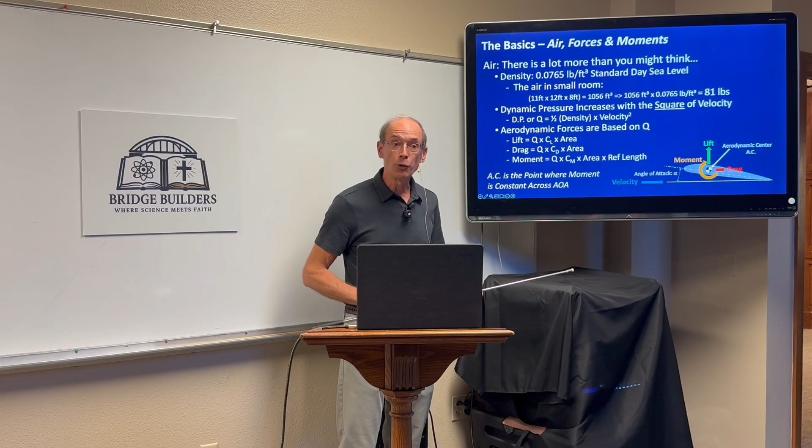But if you're running 30 miles an hour and you start doing that, there's some force on it. But if you do it at 60, you're going to really feel it. And so now let's kind of tie that back. First of all, let's talk about air. We've talked about that a little bit already. We talked about how if we didn't have a magnetic field on Earth, the solar winds would carry the atmosphere away. So it's a miracle that we have an atmosphere that's as stable as it is, consistent, and dense. So I mean, it's really kind of amazing.

The density of air is like a little less than 1/10 of a pound per cubic foot. So you got a cubic foot that's like this big, less than 1/10 of a pound. And it doesn't sound like a lot, but if you look at it a different way, if you take like a small bedroom, like 11 by 12 by 8, and if you could compress that air into like a block that you could carry, it'd weigh 81 pounds. So there's a lot more air than you think. You always think air is just a little bit more than a vacuum. Well, there's actually a lot of density in that air, and that's very important when you're considering aerodynamics and forces on a wing.

There's a thing called dynamic pressure that's key in flying. And the way it works is you take the density of the air and you square the velocity. So again, back to the example, your hand out the window. You're going 30 miles an hour, you've got a certain amount of force. When you go 60, the force doesn't double, it quadruples, because there's a square term. And then you take half of it, and that's just kind of the way the math works for that particular equation. That's called dynamic pressure, and sometimes you'll hear it referred to as Q.

A lot of times when somebody's talking about an aircraft regime of flight, they'll talk about a high Q situation. That means it's going really fast. There's a lot of dynamic pressure. When you talk about aerodynamic forces, and again, this is where some of those engineering conventions start working in, they kind of put a cloud of fog around some stuff that's actually fairly simple, because you already know it because you had your hand out the car window.

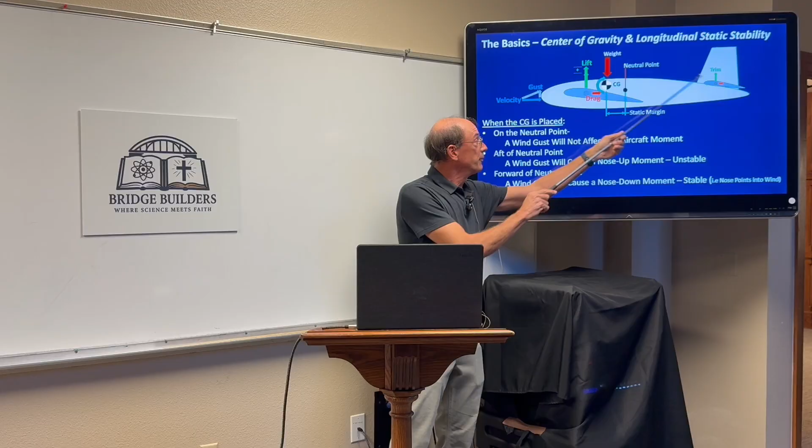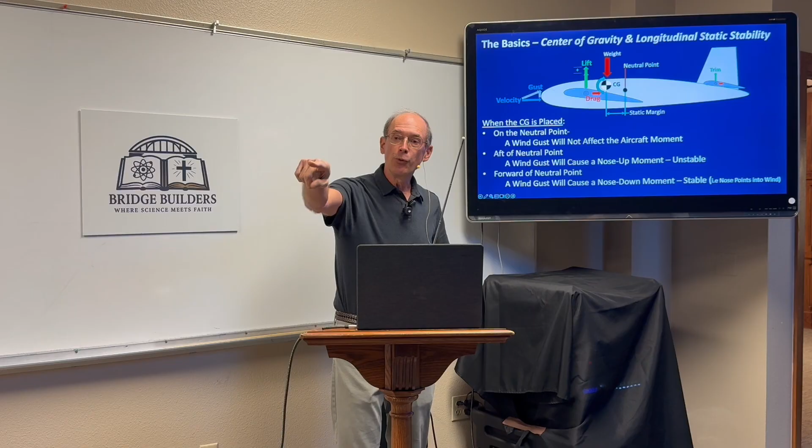Well, what happens is, if you have this neutral point back here, the center of gravity, if it's in front, it's stable, which stability sounds more complicated, but what it really means is you're going to point into the wind. So when you think about an arrow, just to go back to simple things you already know, you've got the fins way back here, and you've got the CG, the center of gravity, way forward of that. So that tells you an arrow, if you shoot it off the bow, is going to be incredibly stable, because the neutral point is way back where the fins are, and the center of gravity is way forward, like halfway down the shaft of the arrow. So it's going to be a very, very stable system.

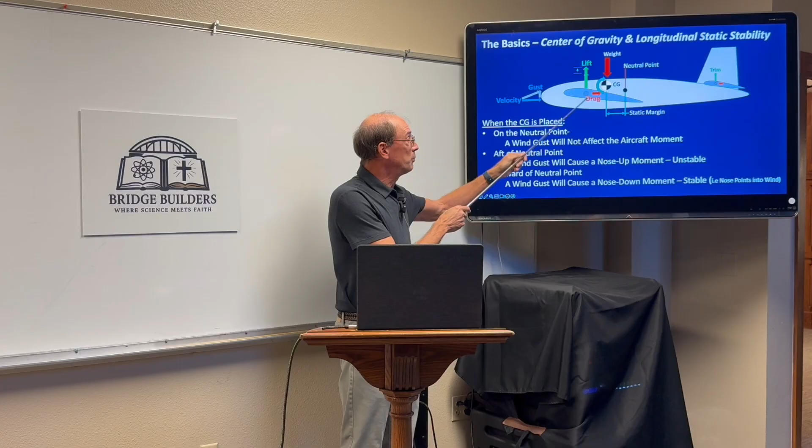When you start putting a wing in front, it looks more complicated, but it's really not. It's the same exact thing. So the idea is that if you get a gust, you want to get a negative moment around your center of gravity. So again, you're flying into the wind. That's all it's saying. I think that's pretty much it on that. Again, it's one of those things where when you watch an arrow fly, you already know what's going on.

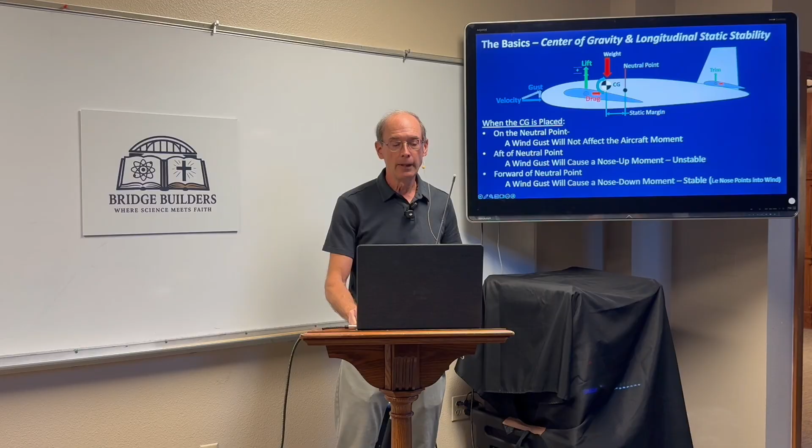There's a saying in the model airplane world that an aircraft with the CG too far forward flies poorly. If the CG is too far aft, it flies once. So that's relative. So if you fly model aircraft, get that CG forward and then pull it back as you've flown it a few times.

Now, this I'm hoping nobody has had firsthand experience with, but unfortunately I have. I had a friend back in my college days who didn't have a lot of money, and we went on a road trip. We drove his car, and he didn't really have the money for good maintenance, and the alignment on that car was terrible.

And if you've ever driven a car that's out of alignment terribly, it's very hard. What happens is you'll be driving down the road and you'll finally get it going straight. And so you've got it, like, I got this thing under control, and all of a sudden you hit a pebble or something on the road and it wants to jerk over 3 or 4 feet. So you're like, oh my gosh, I got to get back. So it's like you're constantly fighting this car.

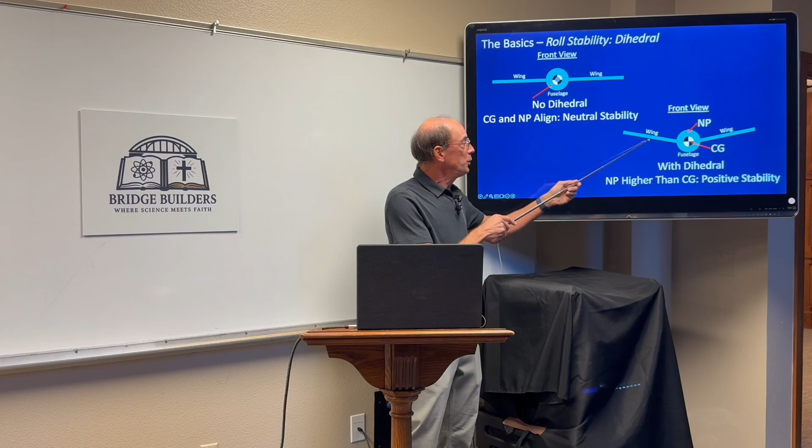One thing you can do to get the airplane more stable, and if you've looked at model airplanes, you'll see that they slope the wing up. What's helpful about that from a stability standpoint is if you move that wing up, the neutral point is going to go up with it. And now you get kind of like a pendulum effect, where you can think of the lift being centered around this neutral point, but the weight is down here. So you get more of a stabilizing thing, kind of like holding a pendulum. It wants to go down. Very similar thing. There's some aerodynamic effects that play into that too, but I'm not going to go there today.

So again, stability, incredibly important. CG placement, incredibly important. And figuring out where your neutral point really is. All that is really, really important to fly an airplane. Okay, let's talk a little bit about aerodynamics. When people talk about airplanes, they always think wings, all that stuff's really cool.

So some of the terms that are used: an airfoil, typically, like we talked about already, is a 2D kind of thing. Usually it is based on an infinite wing, which means that wing just goes out to infinity and there's no trickle around the tips. So there's no vortices around the tips. You're only looking at the airfoil and that's it. That's done to simplify some of the analysis, where you can compare wind tunnel data from one airfoil versus another. This is a lot of what the Wright brothers did.

They have a museum in Dayton. Everybody likes to go to the big Air Force Museum, but there's another one there that is much, much smaller, but it's really interesting. It's called the Huffman Prairie Flying Field Interpretive Center, or something like that. If you get a chance to go to that museum, it's not going to be crowded, and it's very cool. It talks about some of the stuff the Wright brothers did. I think they've got either a mock-up or the actual wind tunnel that they used to do a lot of their airfoil testing, and it's fascinating. Those guys were geniuses, and you just can't say enough about them.

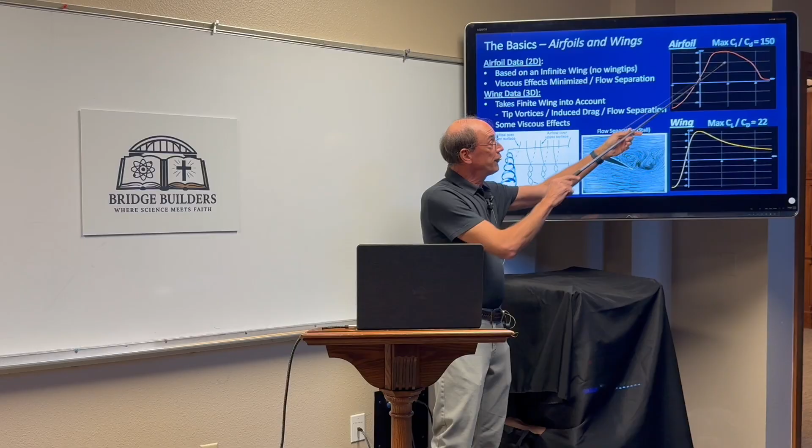One thing about that is when you get the airfoil data, you'll see slope something like this. This is coefficient of lift to drag, so that's kind of an efficiency rating, if you will. If you just take an airfoil and you test it, you can get coefficients of lift to drag in the 100, 150 ranges, incredibly big numbers, which basically means if the airplane was a foot high and you flew it, it would go 150 feet before it dropped. So I mean, that's crazy.

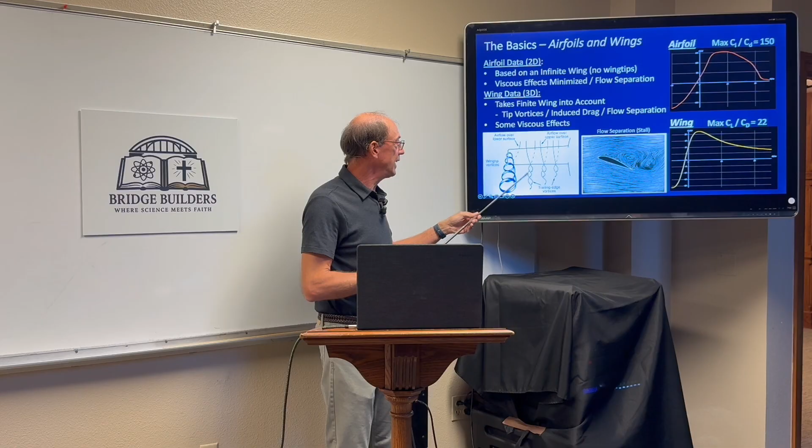What happens though is when you go to a three-dimensional wing where you're trying to make something that actually works, it takes the finite length of the wing into account. So instead of just getting this nice smooth flow over the wing that meets at the trailing edge, you get these really big vortices that form around the tips, because there's a high pressure region on the bottom, low pressure region on the top, and of course stuff wants to go to a stable condition where those pressures balance out. And the wingtip is the only place they can do it. So you get these really, really big vortices around there.

I don't know if you guys have seen an airplane in an air show where, if it's a humid day, sometimes when they're pulling a lot of G's, you'll see a vapor trail form around the wingtip that kind of follows the airplane. Well, this is the effect that you're seeing. This air gets moving really fast around that vortex, and it causes a low pressure region. And so the humidity in the air basically falls out of solution, and it becomes like a liquid, just droplets. And so you can see those droplets. So when you see a vortex coming off of a wing, it doesn't necessarily mean it's on fire. It can mean that it's really working.

Now, when you take an airfoil, one thing that can happen is if you crank the angle of attack too high, you can actually detach the flow. And you see this turbulence breaking off the back where bad things are happening. And that's a little bit of what you're seeing here. This is kind of an analytical solution, so it doesn't really reflect the true turbulent nature of the flow. In reality, this curve would probably roll around a lot quicker than that. Again, you have your hand out the window, you turn it like this, you can just feel how hard the air's working to get around your hand. And that's exactly what you're seeing there.

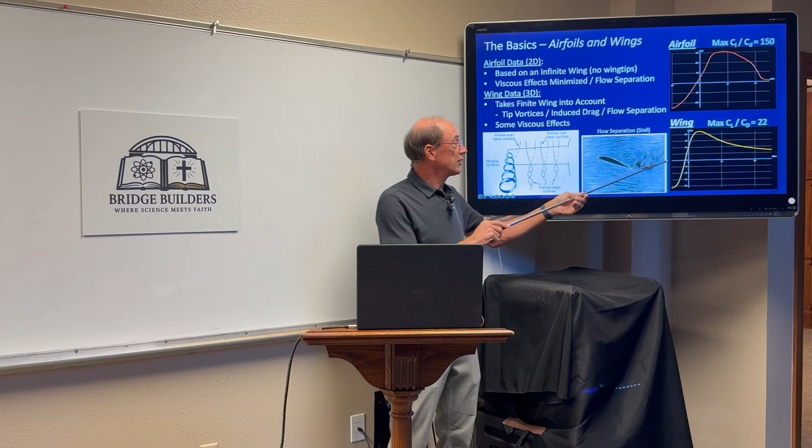Now, when you take the same airfoil and you put it into a wing that's of a fixed length, you start seeing this coefficient of lift versus drag get a lot lower. Typically on a real airplane, that's probably going to be in the 10, 15 to 1 kind of thing. So if you had the airplane a foot in the air and you pushed it forward, it'd go 10 to 15 feet in front of you, which makes more sense based on when you're a kid and you throw an airplane, what you see.

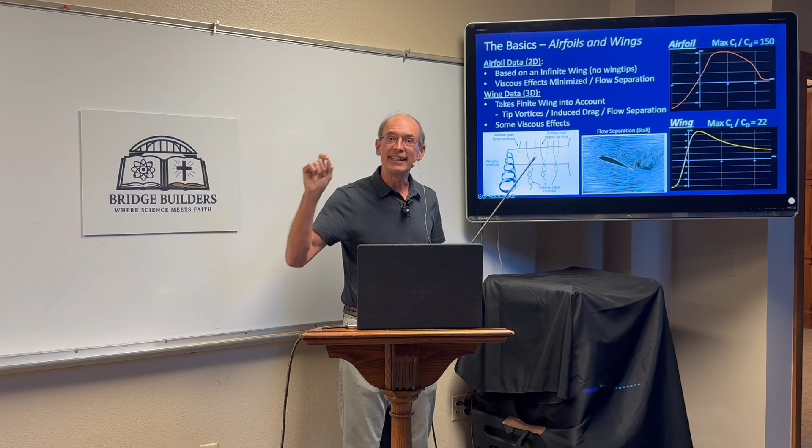So one other quick note is when you're talking about airfoil type data, typically the L and the D in the subscripts in those coefficients are lowercase. When you go to a wing, you'll see them written as uppercase. So that's one way, if you're looking at data, you can tell that it's different, if you ever have reason to do that.

Okay, no really good presentation about airplanes is complete without some kind of reference to a spaghetti western. So here's mine. We've got the good, the bad, and the ugly. And pardon to my friend from Brazil, but I do think that aircraft is ugly, and I'm going to say it out loud.

Okay, the good things, you want lift. And what you want is if you can make that span really, really large, those vortices aren't as big of a factor because you've got more lifting area before you see that flow around the tip.

So what you want to do as an aerodynamicist is you want to make that wing as huge and long as you can. And think about gliders. You know, when you look at a glider, the wing's way out there, and that's because they're trying to get these really, really high L over D's, lift over drag, because they want that thing to glide for as far as it possibly can.

Another thing that's great is thrust. In fact, I had a great boss at Lockheed, and one of his favorite sayings was, "Thrust covers a multitude of sins." So you can design the aircraft really, really bad, but if Pratt can come through and give you an engine that'll push it really hard, you're going to be all right.

The bad things are weight, bad, hate it. Drag, and these two kind of go together, because the more weight you have, the harder the wing's going to have to work, and the bigger those tip vortices get, so you start ending up chasing your tail trying to get there. So drag can be wetted area. You want to keep that thing tight, really, really small. You get induced drag, that's vortices around the tips.

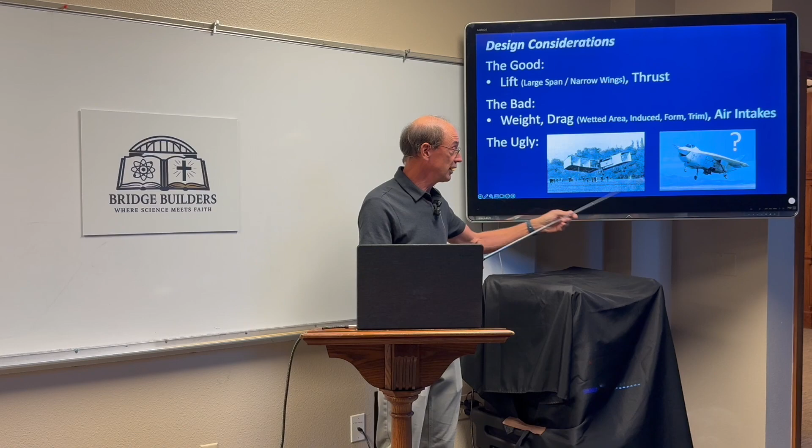Okay, now let's start getting into it. When you start designing an airplane, and we're kind of focusing in specifically on like control and that kind of thing, there are so many things that play into it. And this is where aerospace becomes an art. You're going to get a set of requirements, and it could be from the government, it could be from somebody who wants to build a medevac airplane or something like that. But there's going to be a lot of things that come in.

Max speed, payload, how much stuff does it need to hold? How far does it need to go? What's your max altitude? Because you might have to completely design a fuel system if your service ceiling is 12,000 feet versus 50,000 feet. The world's different when you start getting at those higher altitudes. So you've got to kind of think about that. There's also speed, subsonic versus supersonic. When you go supersonic, the whole world changes.

I like to think of supersonic as if you imagine a busy street in New York and there's people that are walking this way and you need to go that way. If you just walk at a slow pace, people kind of see you coming and they get out of your way. But if you try to run through that crowd, it's a different thing. You're banging into people, knocking them over, all that kind of stuff. So a lot more turbulence, a lot more drag. That's kind of what supersonic is. The air just doesn't have a chance to get out of the way.

And then you might have a bunch of avionics. Somebody might want to put some newfangled radar or some kind of comm system on there that's incredibly complex and takes a lot of power.

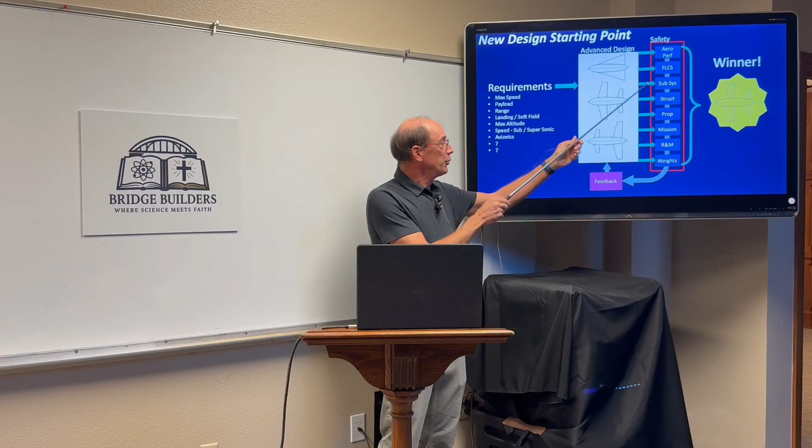Reliability and maintainability, R&M, that's huge. If you build an airplane that can't be maintained, everybody's going to hate it, because it's going to be on the ground a lot. And then you kind of have the weight and balance guys. So what happens is people will come up and draw these configurations. They'll run them through these subsystems and say, okay, what do you guys think about this? Some of them they're going to love, some of them they're going to hate. And what has to happen is you have to have a really, really balanced approach to where everybody kind of has an equal statement in this, or you're going to end up with something that just doesn't work.

Now, one thing that you'll see left off, this is kind of a pretty common slide. You'll see it written a bunch of different ways. But one thing a lot of people leave off is safety. And working at Lockheed, I will say that we, as a company, I never saw anything that I considered unsafe go out for flying. You know, there's stories out there about companies who took shortcuts when it comes to safety and that kind of thing. That didn't happen at Lockheed. There were too many guys that were too good. The test pilots were good. The engineers at Lockheed wouldn't let it happen.

And you had a voice. If you, as an engineer, threw up the BS flag and said, this is not leaving the ground, people would listen to you. So I have a very, very healthy respect for Lockheed and the people that work there. And some of the things you heard about recently that happened wouldn't happen there. And the safety guys, if you do something that's a little bit different, they're going to say, hey, I'm okay with different, but you got to show me that that's going to be safe.

The safety mindset: a lot of times you say, I'm going to show my thing works. Well, when you have a safety mindset, you don't show it works, you show it can't fail. And the two are completely different.

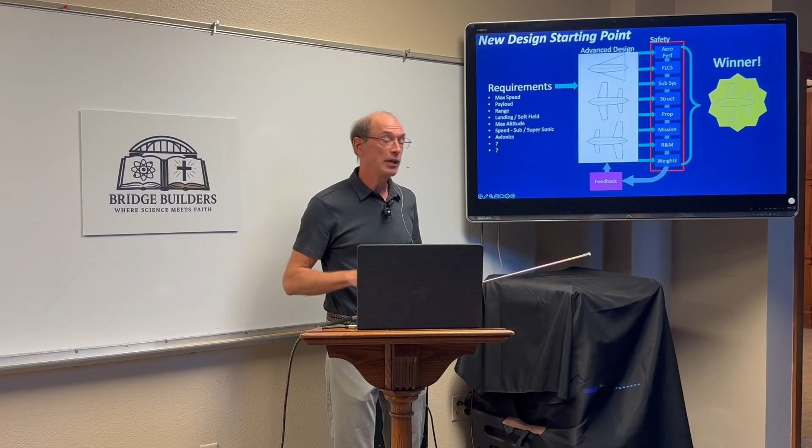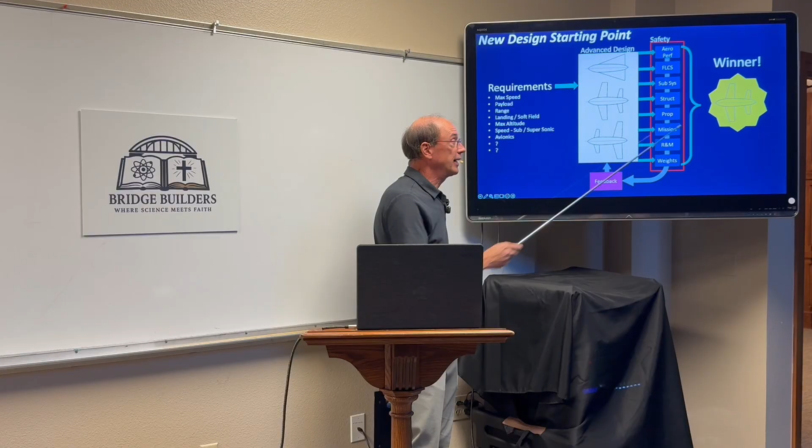You know, when I was doing this presentation, I was thinking about AI, and it was like, man, have you ever seen anything more tailored where AI could kind of help you do it? And this process takes a long time, because a lot of times these are hand-drawn, or automated to some extent, but more or less hand-drawn. Every time you go through the loop, the airplane gets smarter. So if you could do that computer fast, you'd end up with something that was better at the end.

Okay, so I'm going to start building a new airplane. What do I want to do? Why do I do it? My J3 Cub still flies. It's great. It's 80 years old, and I love it. Well, the thing is that things move along. Your J3 Cub can't take a jet engine with afterburning and all that in there. And so the whole time this is going on, things are improving.

Engine technology is getting better. You've got higher thrust to weight ratios. They're more efficient. Jet fighters typically now have turbofans on them. The fans are small, but nonetheless, they've got fans on them. So you get more thrust. All these things are good. Advanced structures, high strength to weight ratio, corrosion resistant, all that plays into it.

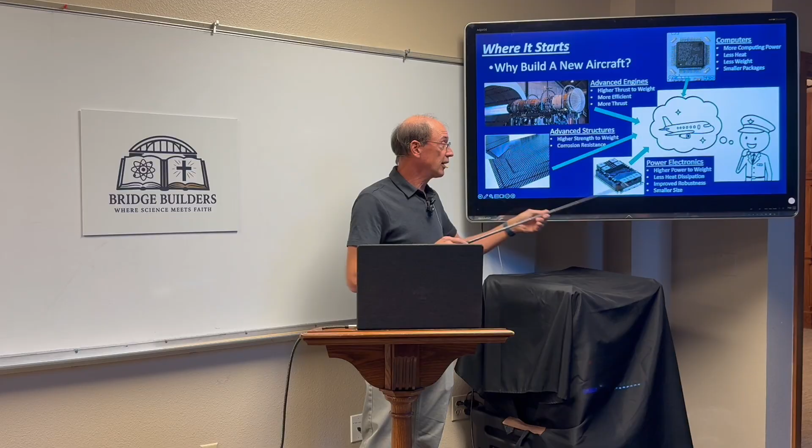Power electronics, this kind of changed. I worked in the electrical power system, and these power electronics have changed everything in the way we do stuff. F-35 has electric start, so the same generator that's used for the generation also starts the aircraft. So it's kind of a twofer. You can leave a part at home because you don't need a starter or air turbine starter or whatever. You can just use the generator to do both purposes.

Computers is huge. Back when the F-16 was first designed, there really weren't digital computers that were fast. They were all relatively slow. And so the F-16 actually was built with a negative static margin. It was unstable. And so they needed something to stabilize it, so they used a flight control computer. That flight control computer was actually analog. They did it with op amps and that kind of thing. I can't remember what block they switched over to digital. It's digital now. But back in the day, it was just op amps and integrators, differentiators and capacitors and resistors. It wasn't some super high tech, very, very fast microprocessor.

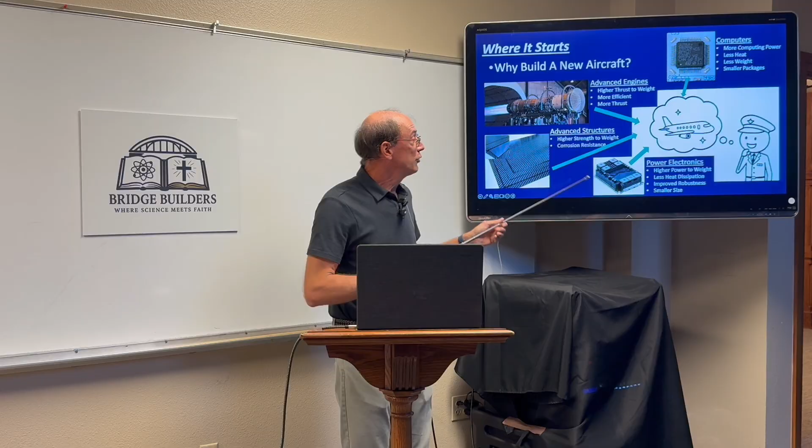So when you put all this stuff together, you get this general over here, and he's smiling because he's got his new airplane he's really excited about to fly. Okay, now let's build one. We're going to set a set of requirements, and we're going to see what that might look like when we do an airplane. So let's say our max speed, we're going to do Mach 0.8. Just made it up. It's just kind of thinking about stuff. So what that's going to do is it's going to impact the wing design. I'm not going to put glider wings on it that go out hundreds of feet. It's going to have to be pretty tight, that kind of thing.

I'm going to put the service ceiling at 50,000 feet. The reason I picked that was because that's where you can start seeing the curvature pretty clearly. And I thought, hey, if I was a pilot, I'd like to see that. So that's kind of fun. But the deal is that you're going to have to pressurize the cockpit, because at that particular point, you probably don't need a pressure suit, but you're definitely going to need to pressurize the cabin to keep the pilot from having issues with hypoxia and those kind of things. And keep in mind, at 50,000 feet, water boils at 103 degrees. You know, when you look at the back of the cake mix box, it tells you if you're making it in Denver, you got to cook it longer. That's because water boils at a lower temperature, so it takes longer to cook.

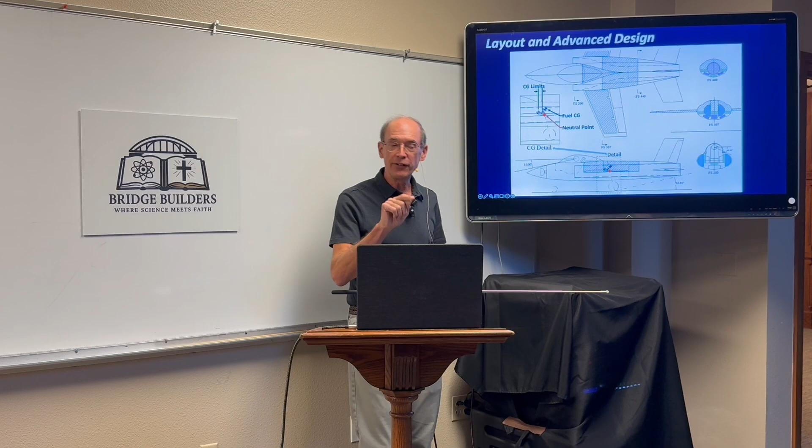Sketched in some routing tunnels, because you want redundancy in your subsystems, and so if you have multiple channels of a thing, you don't want to route them down the same tunnel in the airplane, because if something bad happens, like an engine throws a turbine blade, or a bird hits you and pokes through the airplane, you don't want that one piece of damage to take out multiple systems. So the green is where the routing tunnels would be.

Here you can see the fuel out in the wings and over the top. I made 2 tanks here because you can see the lines coming up. If you made that 1 tank, you'd have to put 2 drains in it, or you trap fuel in one side. So you've got to think about how it's going to lay out. In the back here, this red thing is the engine. You can see the fuel over the top, and again, 3 routing tunnels, and there's just some boxes stuffed in there.

One thing I wanted to detail is the CG stuff. This is actually the fuel CG. I calculated the mass of these various tanks and figured out where the CG would be, and it's right here. This neutral point was based on a program that I ran that's probably not very accurate, but it gives you an idea. So I wanted to set a CG limit slightly forward of that, because I'm trying to make it marginally stable so it's really fun to fly. And then there's a forward limit that would be set by the aerodynamics guys when they look at landing and high alpha to make sure the airplane was always going to be stable.

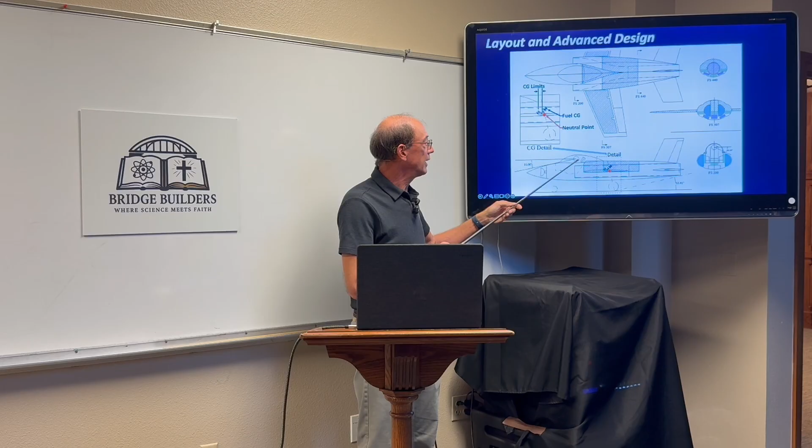A couple of examples are really important. If you look, this is called the design eye of the airplane, where you can see how far down the pilot's going to be able to see. And you see this is 11 degrees. That's terrible, so that'd have to get fixed. This is called a tip-back angle, where when the airplane's rotating, it's got to get to its max coefficient of lift in order to fly off the ground. Here it's shown as 12 degrees. That's kind of marginal. You could probably make that work, but it's going to be sketchy.

Going back to the design eye in this section, you see there's a 26-degree down angle. Again, that's awful. The pilot would feel like he's sitting in the middle of a bathtub. He wouldn't be able to see very much. So there's a couple things in there that are bad. But this is just to give you an idea what a preliminary design might look like. Okay, for a fuel CG, I'm going to go over this really quickly. Here you're going to figure out what tanks you want to burn first.

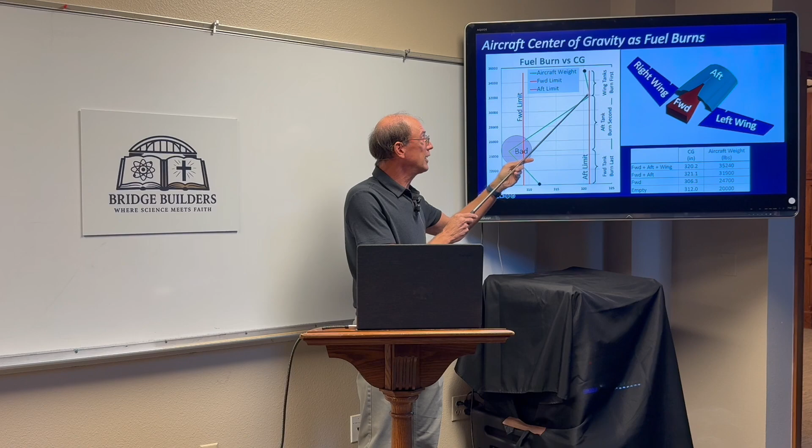So in this particular case, this plot is showing the weight of the aircraft. This is showing the CG location in inches. So the CG with everything full is going to be at this point. And then what happens is you're going to burn a tank down so that the weight of the airplane is going to come down and it's going to affect the CG. So I decided I was going to burn the wing tanks first in order to minimize the inertia in the roll axis, which is typically what aircraft will do.

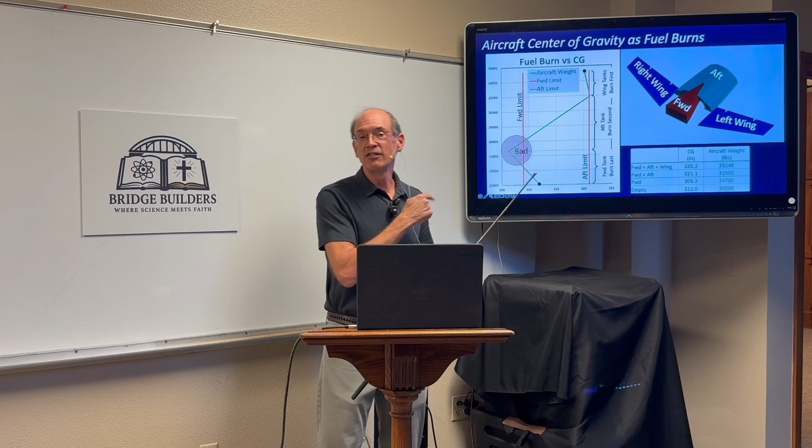Then you burn one of the tanks in the forward fuselage. Now notice when we burn that tank, the CG goes to a bad spot. We're going in front of the forward limit. So we'd have to do something about that. Then as you continue to burn the last tank, you get down here to the empty weight where the CG gets back. Again, it's inside the envelope. But that's not going to work. You're going to have to do something. Redesign the tanks, make a more complex system, break them up into smaller pieces or something like that.